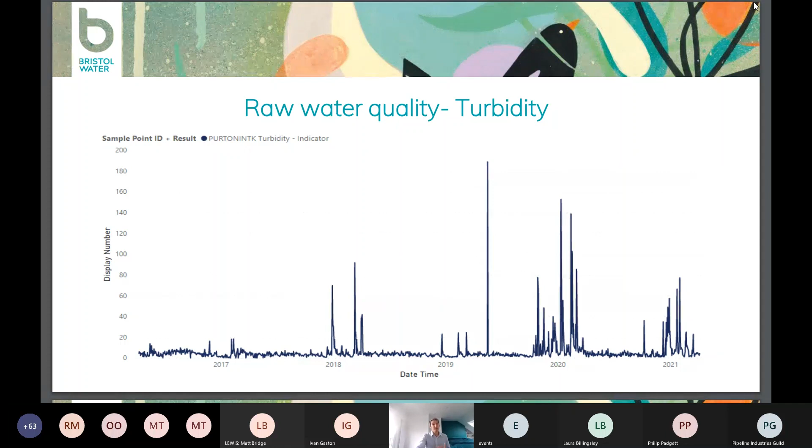So here's an example of something called turbidity. This is a general indicator we use for the amount of particulate stuff usually in water. It's a measure of cloudiness, and the unit of measurement is NTU. As you can see, particularly in 2020, we had some quite significant shifts in quality, mainly the amount of sediment in the water. Also, the amount of colour of water can shift very quickly. We do still tend to get seasonal fluctuations, but it can just change within 48 hours. You can see the spike, particularly in 2020, when we reached an all-time high of over 45. That can occur within a few days.

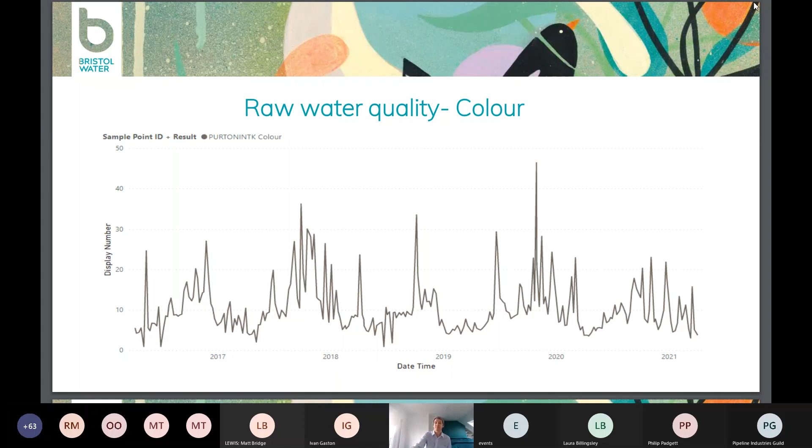E. coli - most people have heard of E. coli. It's one of our indicator organisms we use as a measure of bacteriological quality. We seem to be getting worse as well from 2019. This is all in the raw water that's about to be treated. It's to be expected if you're taking water from a canal, and surrounding the canal is lots of agricultural land. I'll explain how we disinfect the water in part 2 of this presentation.

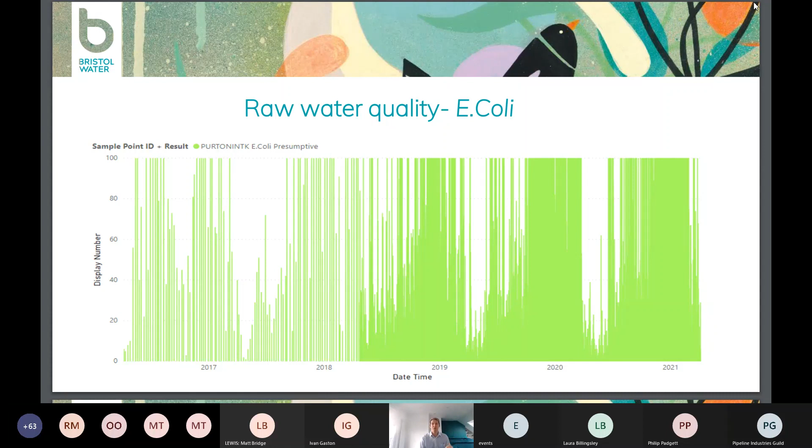Algae. We don't get as much algae on the canal as we would in a reservoir, because the canal is faster flowing, we don't get the algae settling out or growing as much. But we still get some blooms, low levels compared to a reservoir, but sometimes at peak levels it can be enough to affect our filters and how we separate the solids from the water.

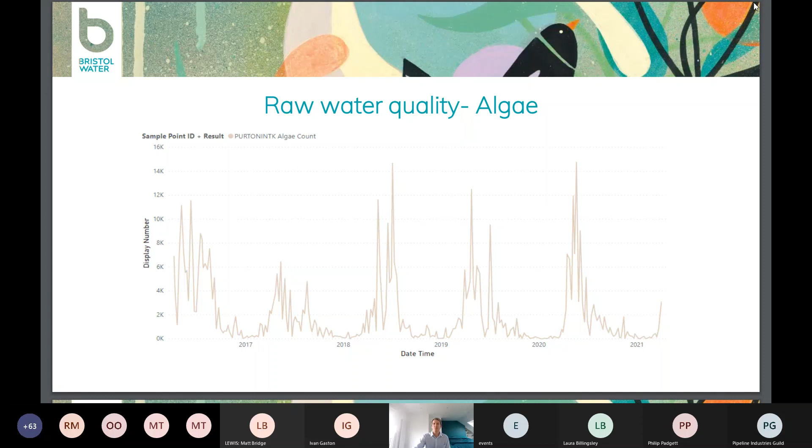And then we've got something called Geosmin, which gives you a kind of hay stack, rotting leaves, those kind of smells you get in the water. We do tend to get peaks of Geosmin. We can take these out quite easily, but the water does get quite smelly at certain times of year. Again, it's just something we have to be prepared for.

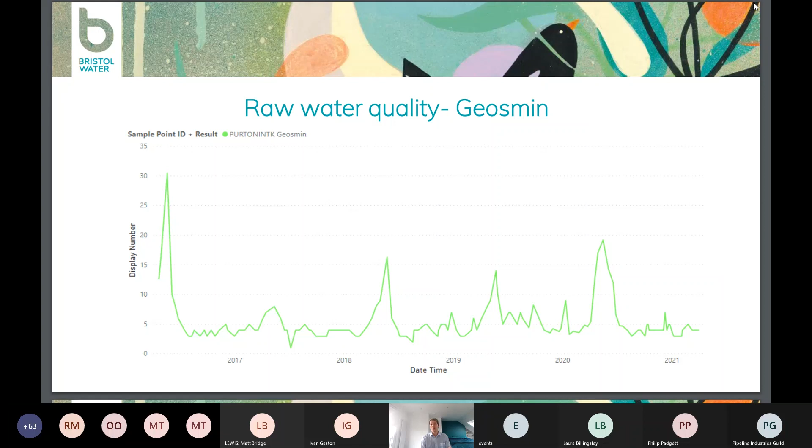For those who haven't heard of Metaldehyde, if you know those little green pellets you put on your marigolds to stop the slugs eating them, the active compound is Metaldehyde. Farmers around the catchment of the canal spread these little green pellets everywhere. Really good at killing slugs, and that's what they're there for. Very, very effective, and actually quite cheap as well. However, Metaldehyde is really difficult to remove during water treatment.

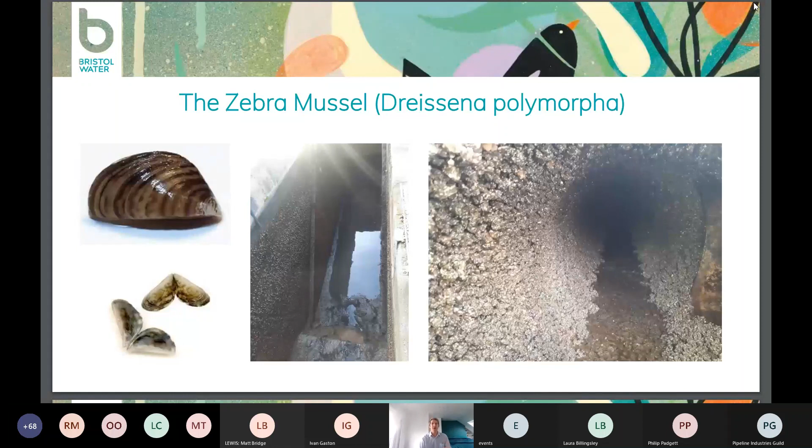Okay, that's part one. So part two, we're going to get into the meat of it now. We're going to take you through each stage of the treatment process, explain why we use those chemicals, and explain a little bit about distribution as well - where does it go once it's been treated?

Here we can see the canal. Purton's is in the purple box and the intake is in the red box.

So we abstract water, we pump it from our intake into some storage tanks. This gives us about half a day's worth of storage. It's useful to have some pre-stored water there. For example, if we had some nitrate coming down the canal, we would run just from the raw water tanks, let the slug of high nitrate water pass by the intake. When we're confident that's passed by, we can start taking water direct from the canal again. So it gives us a little bit of resilience.

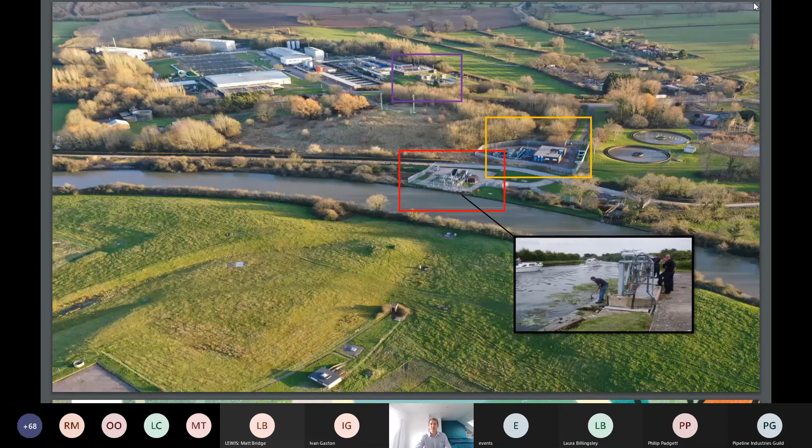Here's another picture of the intake. We actually use something called band screens, which are these giant revolving screens. These are good for taking out all the large stuff that ends up in a canal - sticks, fish, welly boots, shopping trolleys, potentially. You get some quite interesting things that get lifted and kind of flicked over into this big pile.

Once we filter out all the really big stuff, then we pump the water into the treatment works. Some of these pumps are absolutely massive. There's so much energy being used here just to get the water into the treatment works.

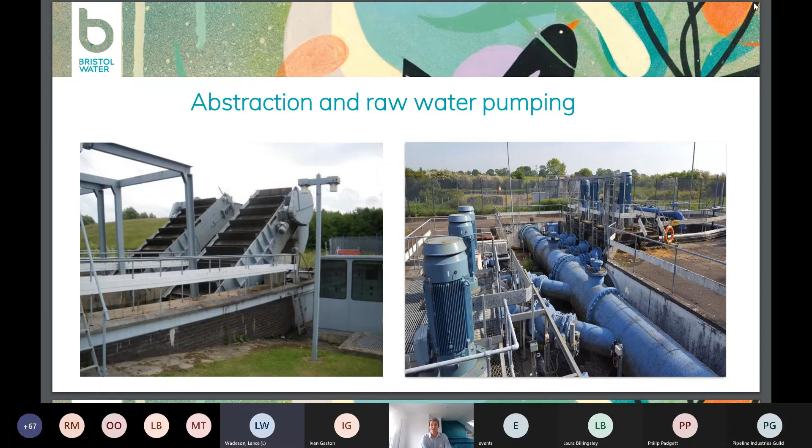Then we have our blending. So sometimes we can take direct from the canal, sometimes we can take from the raw water tanks, depending on what's happening with quality.

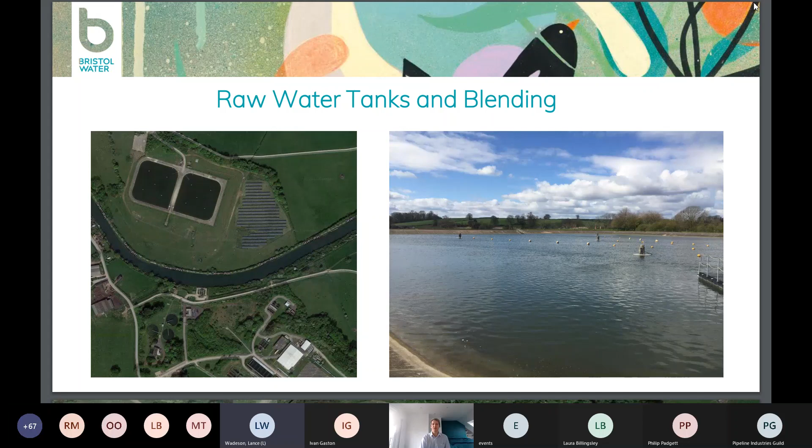Now the first chemical stage of treatment is the addition of sulfuric acid. The water that Bristol Water treats is alkaline, generally around pH 8.

For the next stage of treatment, we're going to be adding something called a coagulant. It's a bit like a glue - a liquid that we add to water and it sticks all the bits together and those bits are going to settle out. In order for that liquid coagulant to work, we need to dose it into the water when the receiving water is at a pH level of around 7. So our raw water is pH 8, we add a small amount of sulfuric acid just to reduce the pH to pH 7. That's in the right target range, so then we can add our coagulant.

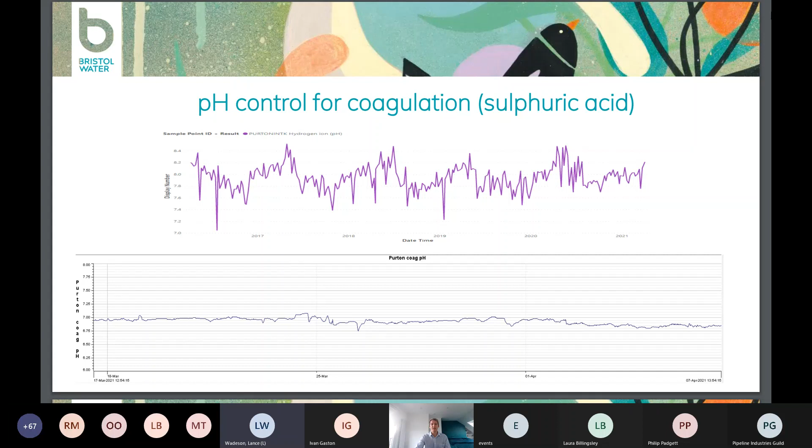Once we're happy that our pH is in the 7 range, we can then add our coagulant. Alkalinity can also have an effect as well. The water that Bristol Water treats is classed as hard, meaning there's lots of calcium and magnesium minerals in the water. When we add acid to water which contains those minerals, it's almost like it sponges up our acid - there's a demand there. So water with high alkalinity can have a greater buffering effect, meaning we need to put more acid in to counter that.

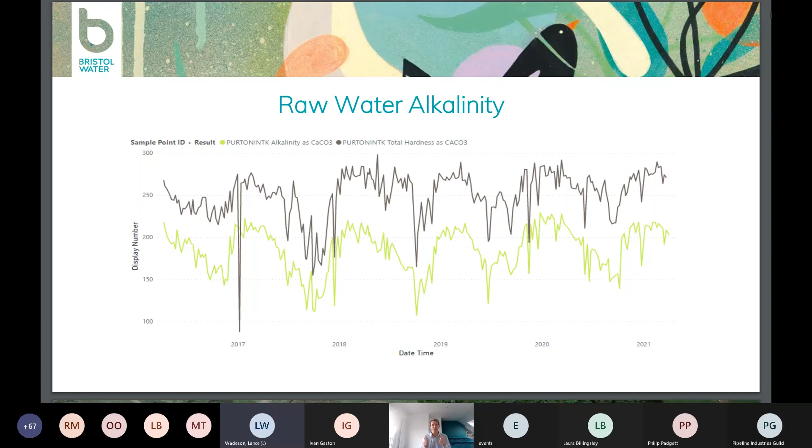Here we can see the seasonal fluctuations in alkalinity. So the price of water, not for the customer, but certainly for us, can fluctuate on a seasonal basis as the alkalinity goes up and down. When it's high, add more acid; when it's low, add less acid. So it's important to remember that the quality is always changing, and that's one of the big variables. It's not just about the millions of litres of water and tons of chemicals - it's also this continuously fluctuating quality, so it's constant optimization and adjustment needed.

Coagulation - this is a very standard approach to treating water. We use something which is a bit of a mouthful, called polyaluminium chloride, or PACl. In essence, it's a glue, a liquid aluminium glue. It's very positively charged. We add it as a liquid into the water, and we're adding it in this orange area here. I've got some other photos in a sec.

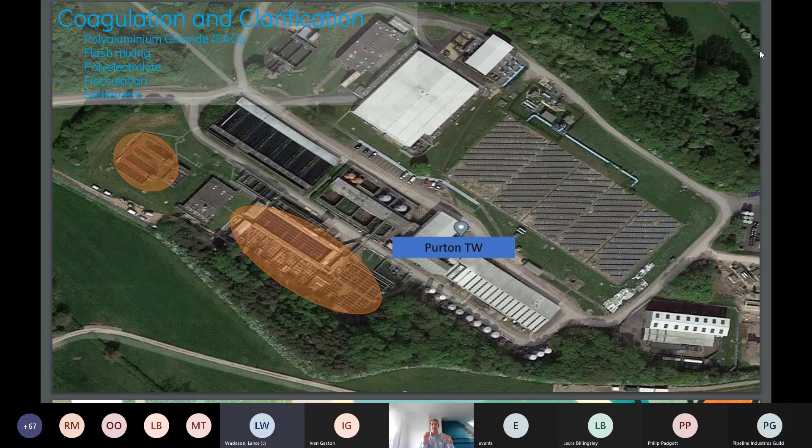If the pH is right, if it's 7, and you add this aluminium liquid to the water, when it hits the water, the liquid will change almost instantaneously into a particle, a very fluffy particle that's positively charged. And these particles will start to attract all the stuff that's in the water, all the particulate matter. Because they're very sticky, they'll all start to bind together, so you start to form bigger and bigger lumps.

We have a series of mixers, so we want a nice homogeneous mix of all our coagulant and our glue, sticking everything together. Where possible, we try to use little waterfalls - it's free, so it encourages good mixing.

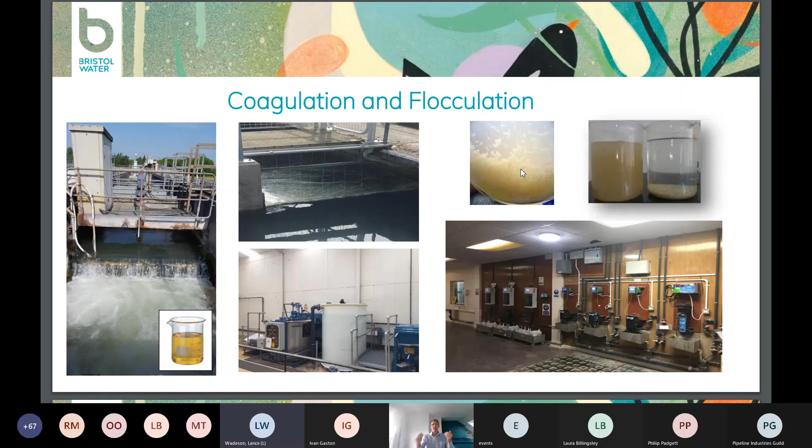Now we use something called hopper bottom clarifiers - huge structures. The water with all the coagulant in is put into these big hopper bottom structures. The coagulant is heavy, so all the bits will end up settling down to the bottom of the clarifiers.

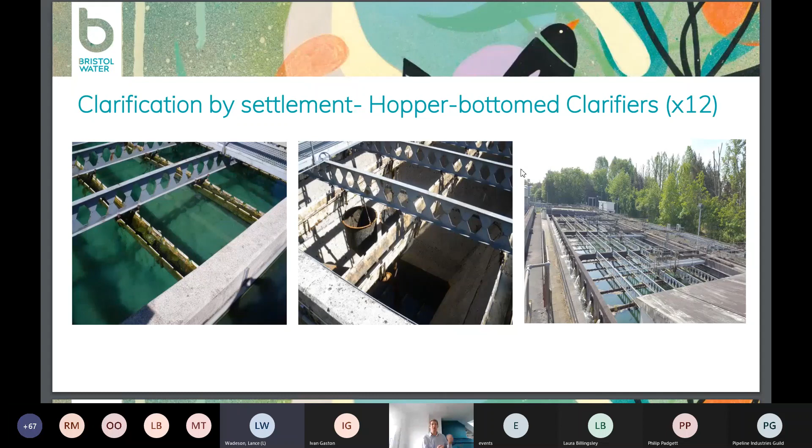All the solid ends up getting drained out of the tank. We pump it out, and there's a separate waste treatment process for managing the sludge that's removed from settlement. I'm not going to include the waste aspect in this presentation, but just to let you know that whatever we add to the water, that also has to be removed in order to treat the water, and that waste has to go somewhere.

We have different types of settlement processes. These ones are pretty cool - they're called super pulsators. These are flat bottom clarifiers, and they have something called lamella plates on the inside. Whereas hopper bottom clarifiers are a big tank, these are flat bottom tanks.

The super pulsators were added as Purton expanded, and we needed some - it's like a bolt-on process to keep up with demand.

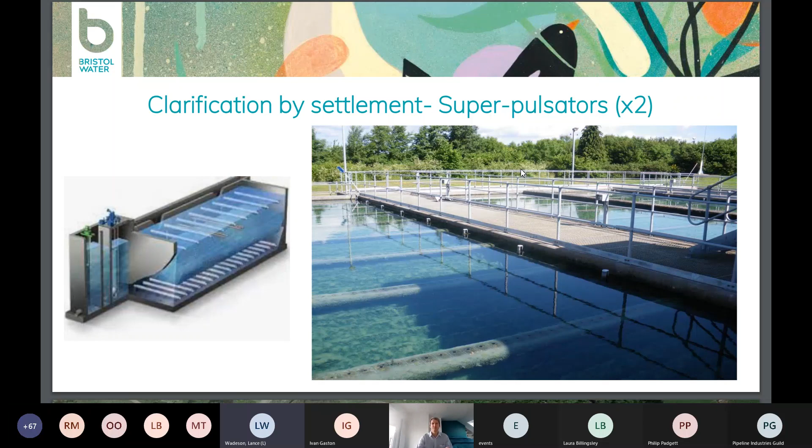The next stage is filtration. We have something called rapid gravity filters, often referred to as sand filters. So once the water's been coagulated, we're going to send it through to our filters.

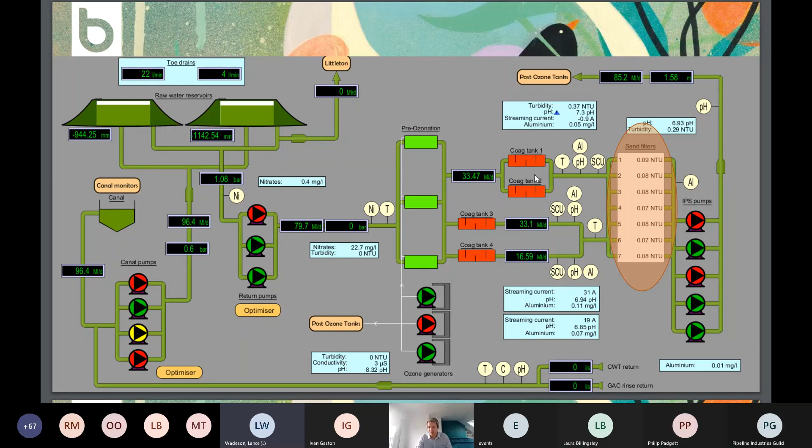Here they are - they've got 7 filters altogether, and they're packed with a black sand called anthracite. Basically giant sand pits that are about 1.5 meters deep.

These filters are really good at taking out the remaining solids that got carried over from our clarification process. Clarifiers will typically take out about 90% of all the solids. Our rapid gravity filters, and the clue's in the name there, will take out the remaining bits from the water.

Now, these filters can also be backwashed automatically. Depending on what we call head loss, depending on how much they're blocking up by doing all that filtering, it will send a trigger which will start some backwash pumps. The water will then, instead of trickling down through the filter, get pushed back up the other way, and that helps to remove any solids stuck in the filter media.

Really reliable, and again, it's a fairly conventional way of treating water: clarification plus filtration.

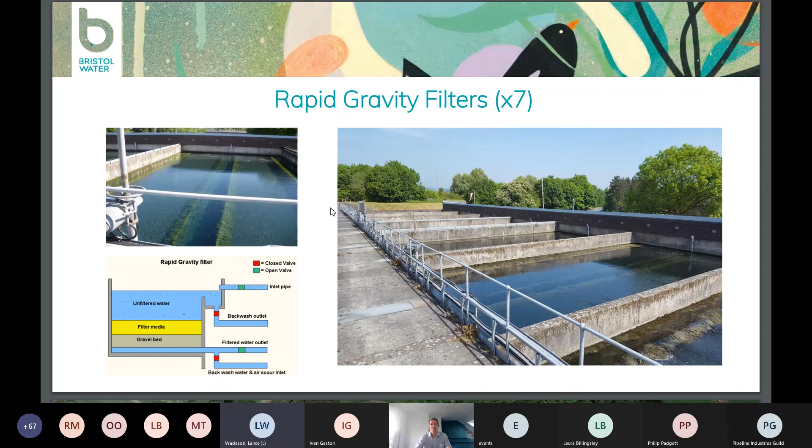The next chemical stage is something called ozonation. Ozone is a very strong oxidant, and it's really good at breaking down things like colour, taste, smell, pesticides, also metals that are dissolved in water - things that can't necessarily be taken out by our filters. Dissolved metals can be oxidized using ozone. Really, really versatile treatment chemical.

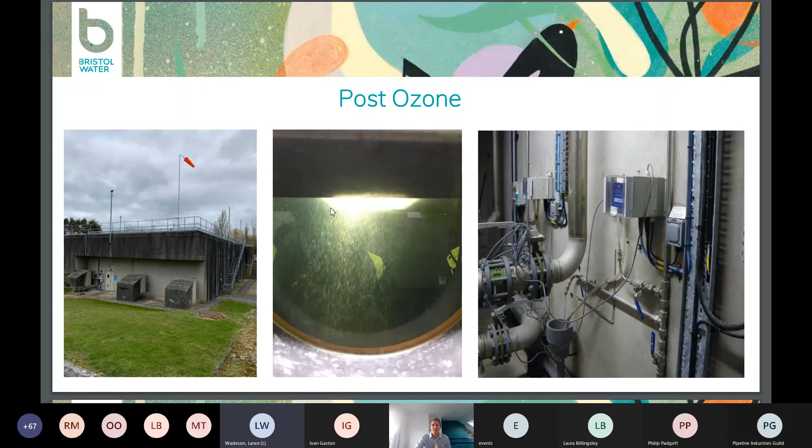We take liquid oxygen, we put it through a generator, which is on the left here, and that converts the liquid oxygen into ozone gas, O3. Ozone is then released by diffusion inside the tank, and it's all those microbubbles that do all the oxidation and can break down all those parameters I've just described.

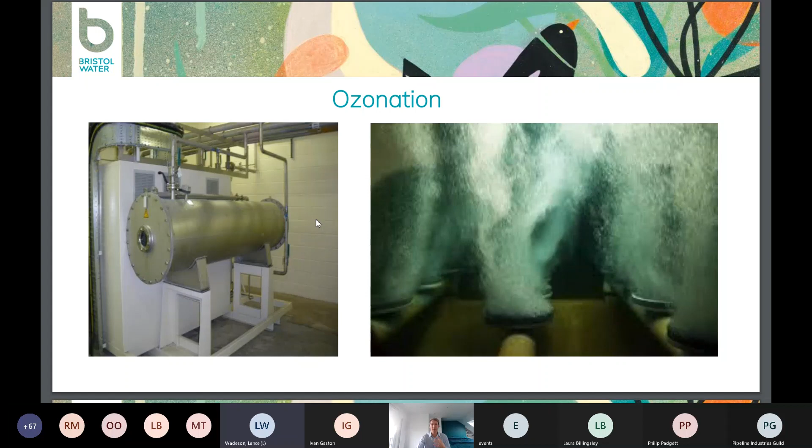Really, really effective, and it doesn't leave a residual in the water. It can, however, cause some treatment problems if it's not well controlled.

Bromate is a challenge for us. If you have bromide in your water, which we do, and you add ozone to water, there is a risk that you form something called bromate. The drinking water standard for bromate is 10. There are times when we have reached 10 previously, back in 2017. Usually we sit around, on average, around 4. But it's something we have to monitor the raw water closely to look at the amount of bromide, then adjust our ozone dose to make sure we're not going to exceed the drinking water standard.

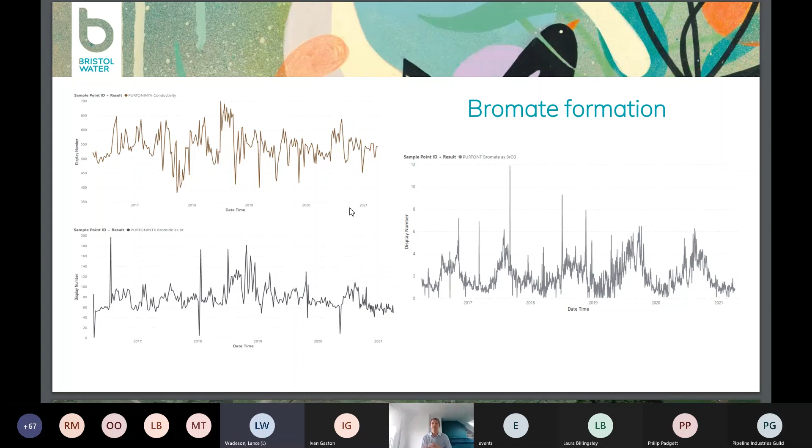The next stage of treatment, once we've added our ozone, is we stick it through some more filters. This time we use GAC filters, granular activated carbon. These are different to the other filters we just described. GAC, or activated carbon, is really good at absorbing dissolved things from water, things like smell. You can find carbon filters in Brita filter jugs - it's the black granulated stuff in the cartridge. These filters are amazing at absorbing colour, taste, smell, pesticide. So in combination with ozone, these two things are great at solving our pesticide problem.

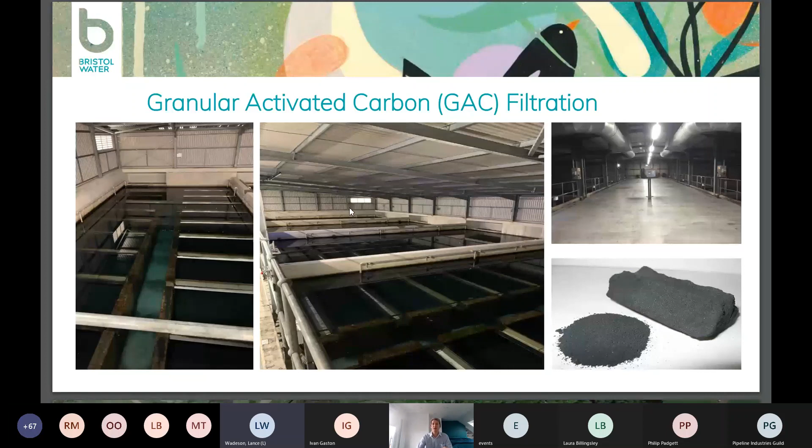Once the water has been through the activated carbon filters, really by this point we've removed all the particulates from the water that we're going to. We've oxidized as much of our dissolved stuff that's in the water, whether it's metals or pesticides, colour, taste, smell. All that's left to do now is to disinfect the water. We're going to remove bacteria, kill bacteria and viruses, to ensure the water is safe to drink. We're going to use UV irradiation, or UV light, to do the disinfection.

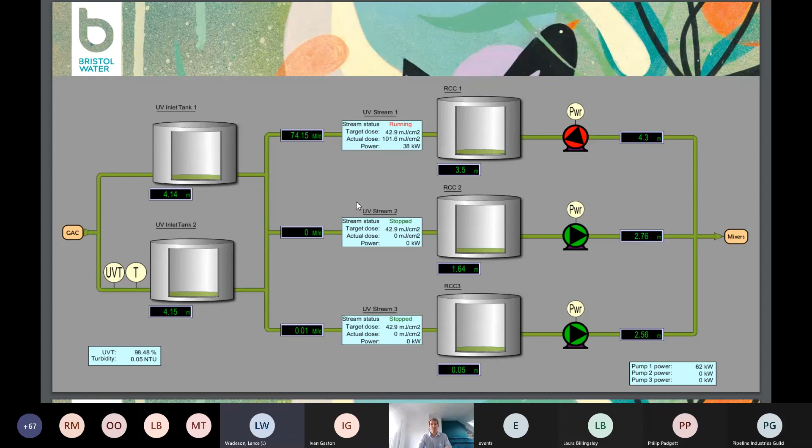UV has been around for a long time, but for a lot of water companies it's only been more recently that it's been adopted. For Bristol Water, it's been since 2017 that we've really been using UV in anger. We now have UV at all of our major treatment sites, and quite frankly it's absolutely brilliant. The reactors themselves are very small - water comes through. You can see the green pipes. The reactors are these small stainless steel units here, and then the pipe continues at the other end. Inside are around 30 strip lamps, and that's the flow of water.

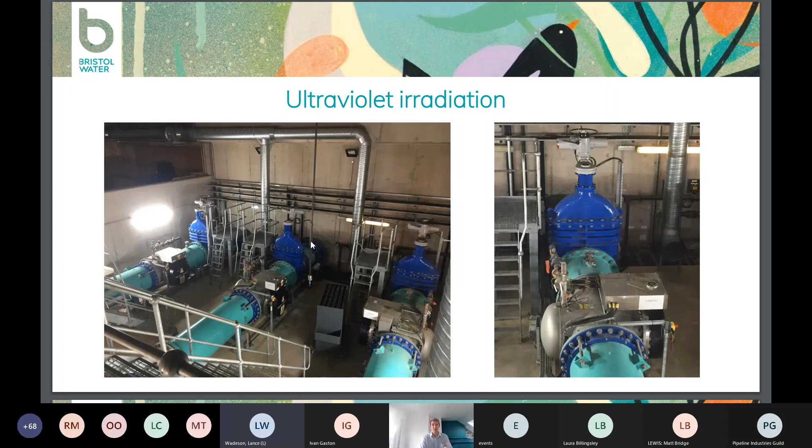Whereas for suntanning you have UVA and UVB that you get from the sun, you also get UVC, which is the biocidal range of the UV spectrum. So we're using UV light - it's the same light you get when you're doing welding, you have to put the mask down, because of the UVC radiation that can be extremely harmful. I think the potency is such that even if the water only comes into contact with UV light for literally about a second, which is in this case at Purton, that is sufficient to kill off the bacteria and viruses that's in the water. The UV is that intense.

Now, in order to get the UV light into the water, we need to make sure that the water itself is clear. We use something called transmissivity. You can see it on the left, 98.4 as an example. So Coca-Cola, for instance, if you shine a torch through a bottle of Coca-Cola, you're not going to get any light coming out the other end - that would be a transmissivity of 0. Ultra pure water would have a transmissivity of 100%. So that's the spectrum - we're on 98 here. The cleaner or clearer your water is, the more UV light can penetrate the water. If your water's got lots of bits in it, if it's quite turbid, then the UV light can be intercepted by those bits in the water, and your disinfection isn't going to be as good.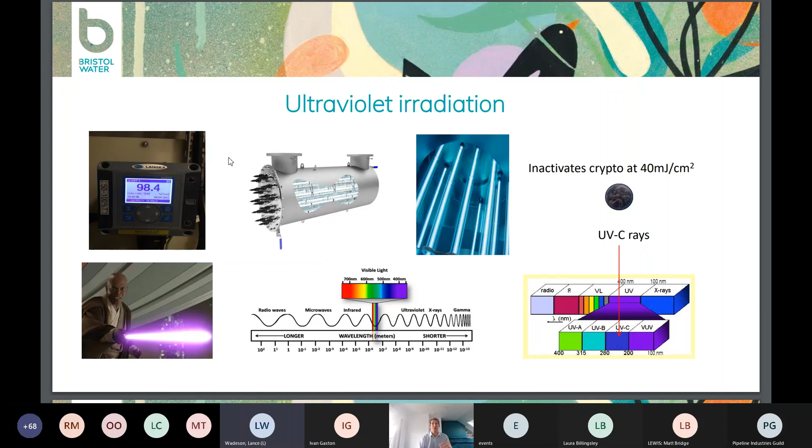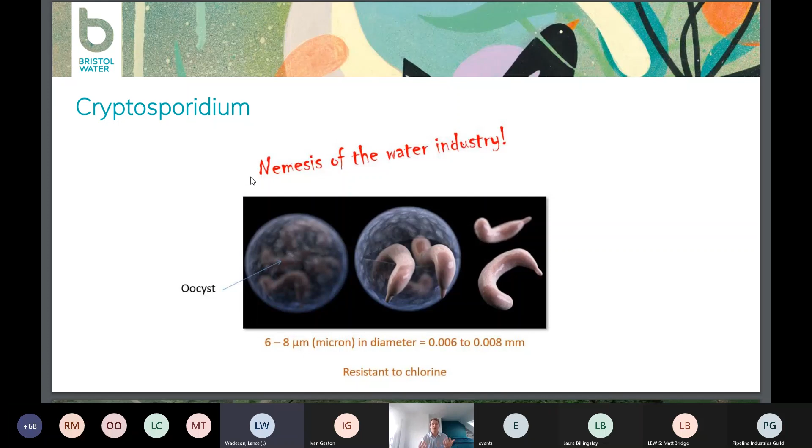We use UV light, yes, for bacteria and viruses, but also for other organisms, in particular something called cryptosporidium. Most things are killed by chlorine. However, cryptosporidium is something that, because of the way it lives in this kind of little egg, this protective shell, chlorine isn't able to penetrate through its shell. Cryptosporidium you can typically get from animal intestines, and it can make you really, really poorly. Yes, we can filter some of these things out, but ultimately some of them do get through, and if something is resistant to chlorine, you need something else in place to be able to deal with it. This is where UV light comes into its own. UV light can actually penetrate through the protective shell of the organism, and it doesn't exploded them, but it corrupts their DNA so that they can't reproduce. So they're still there, they're just inactivated and rendered harmless.

Chlorine. We're getting to the final stage now of water treatment. Chlorine is a tried and tested chemical that has stood the test of time for water treatment, in part because it gives us a residual, so it lasts a long time, which is good. That gives us some long-lasting protection of water. We used to put in a high dose of chlorine to kill off lots of the bacteria and viruses. But if you put in too much chlorine, people won't be able to drink it because it would taste horrible. So we'd actually dechlorinate the water slightly before we send it out into distribution.

Now we have UV light. UV is the primary disinfection, killing off all of the stuff. Chlorine, we add a smaller amount in to just provide a protective residual as the water is travelling through the network. If we didn't add chlorine, the pipes connecting the treatment works to Bristol would, over time, get very slimy. Things will start to grow, and with things growing inside the pipes, you're more likely to start getting musty tastes and smells, and all the bits that grow could potentially slough off and be carried through the network. So it's there to provide protection to the water as it makes the journey into Bristol.

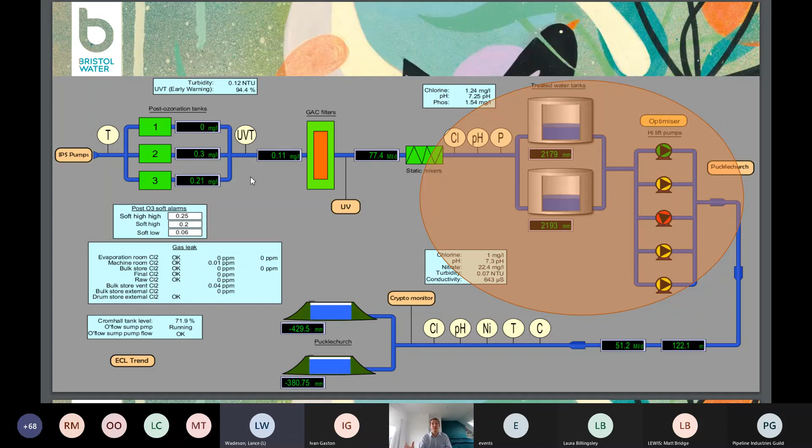We actually produce our own chlorine on site, something called on-site electrochlorination, or OSEC. We used to buy it in as gas. When you're dealing with gas chlorine, it's extremely dangerous. Now we're able to produce our own, with giant tanks full of salt and some electrolyzers, which electrolyze that salt and form sodium hypochlorite. Switching from gas to liquid has saved on health and safety. It's much more improved, but also the logistics - we don't have to bring tanks and tanks of chlorine gas to the treatment works. We can just produce our own on site, and we'll see this more. This will be rolled out to other sites as well, smaller remote sites where we can just have a small setup, a small electrolyzer with a brine solution and a receiving tank, and you can just make your own. So this will become more commonplace.

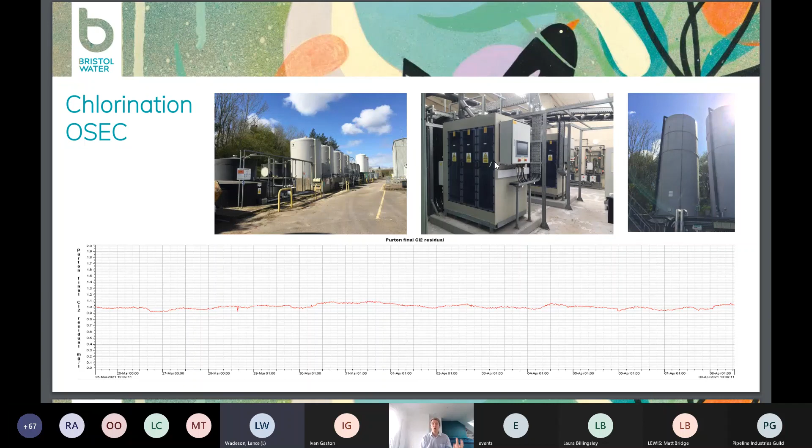There's a few different pumping stages that we've seen. One is the raw water pump, to get the water into the treatment works. We also have an intermediate pump set that pumps the water from the filters to the ozone stage. And then at the end of the treatment works, we have these big high lift pumps to boost it down into Bristol.

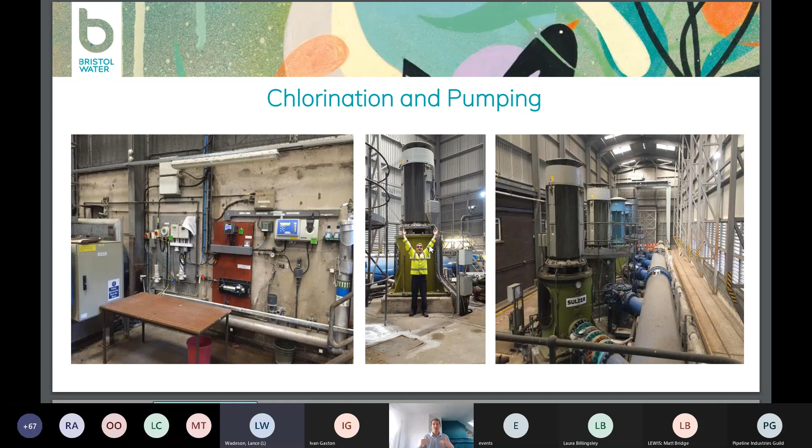With all these different instruments, you can set high warning alarms, but also high level alarms as well, which will shut the treatment process down completely and stop the pumps.

Once we've treated the water, we pump it down into something called a service reservoir. Bristol Water have over 150 treated water structures throughout its company area, positioned at some of the strategic high points. At certain times of day, usually when everyone's asleep, we pump the water to fill up all of our concrete storage boxes, ready for when people wake up in the morning.

So then we have our first demand period when people want their showers and are waking up, having their breakfast - the level of water in the service reservoirs will go down. Then everybody goes to work, and that's our time to start filling up all our structures again, ready for when people get back from work. So we have this twice daily demand period.

Pucklechurch is just on the ring road, just to the east of the city, and it's the equivalent to about 2 football fields internally. It's in 2 compartments as well, so if we need to take one out of service for maintenance or inspection, we've also got the other one - but normally we run both compartments at the same time. They are absolutely massive, but you wouldn't even know they're there.

Most of them are built underground with a little grassy top, so a lot of the assets, although they're at high points, are well disguised - to the point where staff can sometimes find it difficult to find some of the structures.

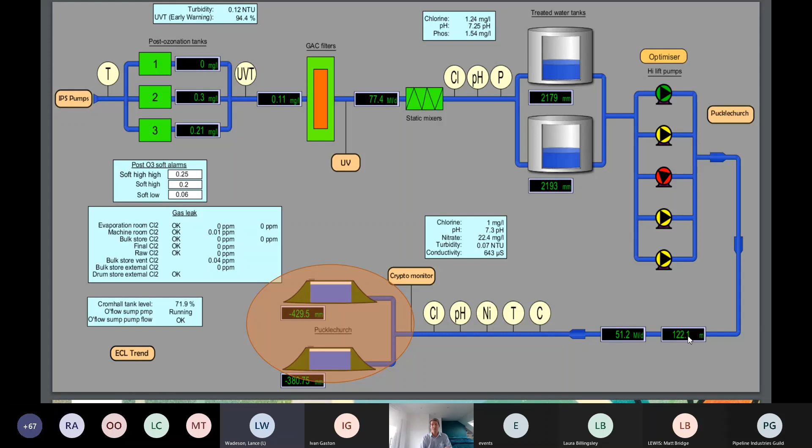Pucklechurch is arguably the most important strategic asset that we have. As a consequence, the security of the site is absolutely fantastic - it's continuously monitored by cameras, listening devices, and high security lids.

Here we can see the demand period, or the intervals if you like, from when the structure fills up to when it reduces.

Now, Purton Treatment Works, because of its strategic importance and because there are so many people that it supplies, can't really shut down. We can shut it down for 8 hours, potentially, for some maintenance - maybe 12 hours. When we're getting to more than 12 hours, people get very fidgety.

So not only does the quality have to be exact, because of all the people downstream receiving this water, there's also the sufficiency of supply - we need to make sure that people get water continuously. The economic impact of failing to produce water can be huge in a very short space of time.

So there's a big responsibility, and I suppose that's the trade-off. You can have one big treatment works, you've got lots of eggs in one basket, and you can really refine that treatment process to make sure it can treat the water consistently. However, if you do get problems, you don't necessarily have the resilience that you would have if you had lots of little treatment works all supplying the area.

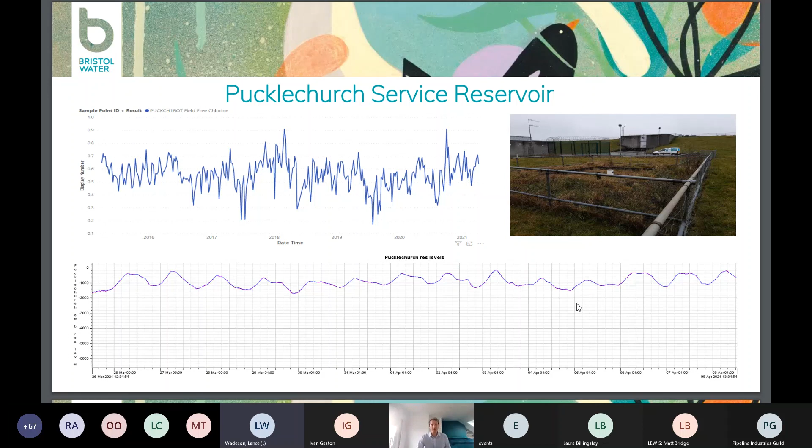Now, there's an awful lot of information there, and we are just coming to the end. I think that's it.